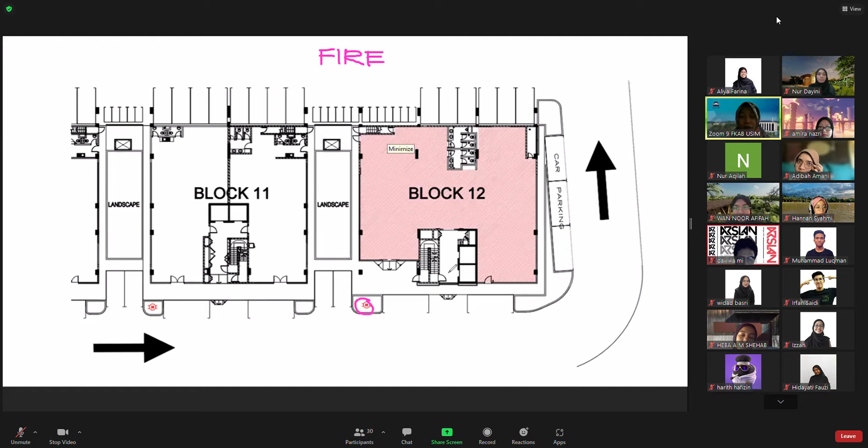Okay, remember, just the fire requirement, you have to understand the route, or the fire appliances. Where the fire appliances, meaning fire engine car, fire engine lorry, access to your building. So I can foresee that normally when we do the drawings to submit to bomba, we are about to color the pathway, the road to our site.

So maybe the color of the road is yellow, normally for submission. This is actually the accessibility to the lots. Normally we color it in yellow. So this is just to say that the whole thing here is fire access.

Remember that I'm telling you the chart of how much is the fire access requested. There would be one quarter, okay, based on volume, meaning that you have to calculate.

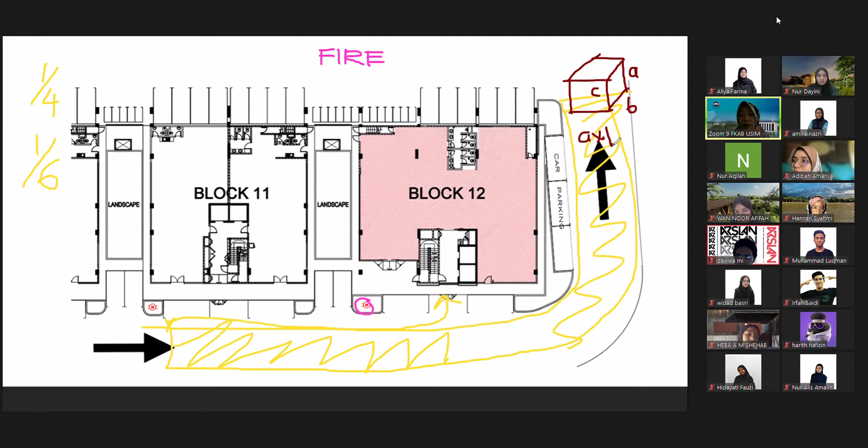You have to calculate the volume. What is the volume? Volume of the building. A times B times C, A times B times C is volume.

Betul tak, volume? This one you have to present in your site analysis lah. When is your presentation for site analysis?

Hello. When is your presentation for site analysis? Yes, it is so near because the legal group need to calculate. Refer to my chart, to my notes.

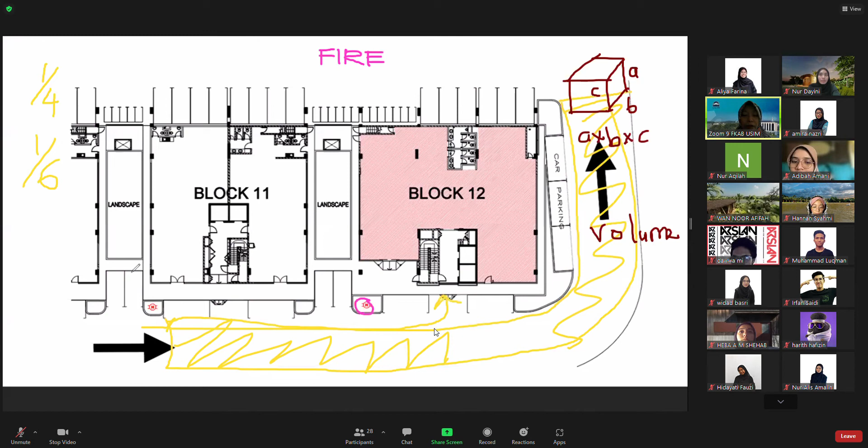So the volume, from the volume you will determine whether, okay, let's say this is your site and this is your building, so you have to determine your accessibility. Is it up to here, or is it island? Island means surrounding.

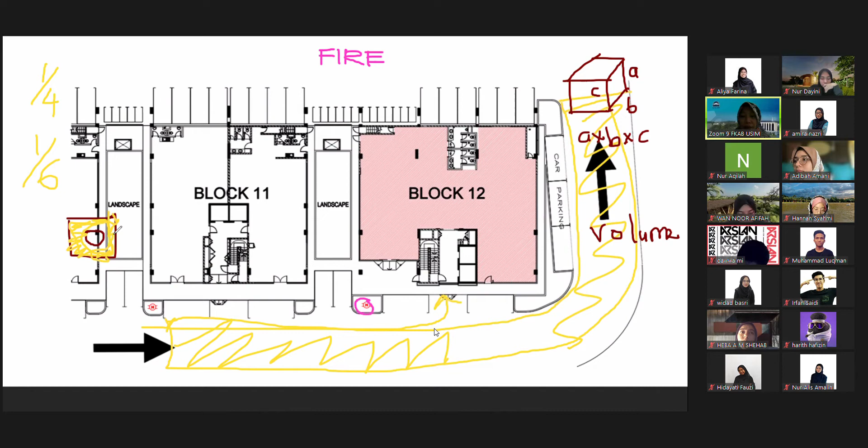Island means all the area except the center, because your building is at the center. So it's considered as the accessibility for fire appliances. Remember that. Okay, for this one, after you already check the accessibility, you know the accessibility, the road, how much?

1/4, half, 3/4. So you have to understand where is the location of hydrant. You have to understand that. After you understand that, you need to know, is this building using wet riser or dry riser?

Wet or dry? How to differentiate? You have to differentiate based on the height of the building. You have to know if the building is more than 30.8 meters.

This is, you have to refer which section in bylaw. Please check the previous. I will let you know because you have to check, you have to read. If not, you are not reading your bylaw.

Okay, is it 30.8 or 18.5 meter that need dry riser? Okay, below 18, you need to use wet riser, meaning that it's a hose reel indicated inside the building.

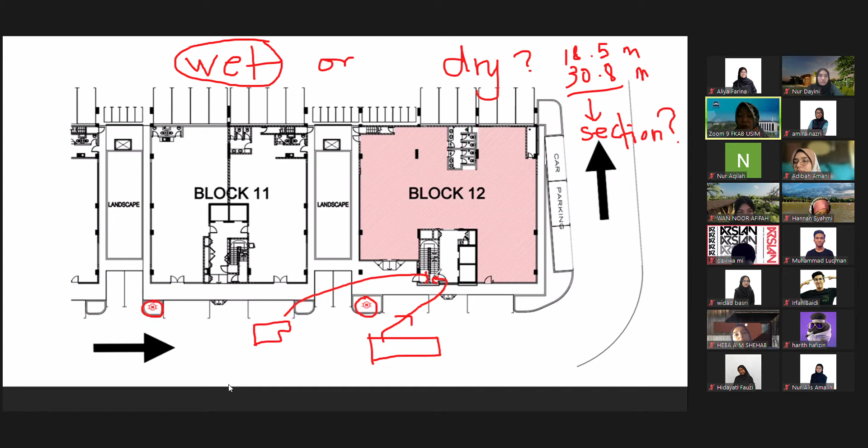Dry riser normally for the building that exceed the height of 18.5 or 30.8. This is according to bylaw.

Find out. Haris, are you hear me? Haris. Ada. Yeah. So far, so far, why do we want to use wet riser or dry riser? What is wet riser, dry riser?

Is the supply of water. If we are on fire, supply of water. If the building on fire, you know?

Okay, that is why the responsibility of architect is very big, because we have to know how the occupant inside the building evacuate, save themselves, evacuate from fire, get out from building immediately.

So it's important for architects, right. If you are not doing your work, your task, you are designing differently, not according to bylaw. I think this is your responsibility until the hereafter. Until the hereafter, they will ask you, hey, Architect Haris, why have you not designed the hose reel accordingly, or fire staircase? This is your responsibility.

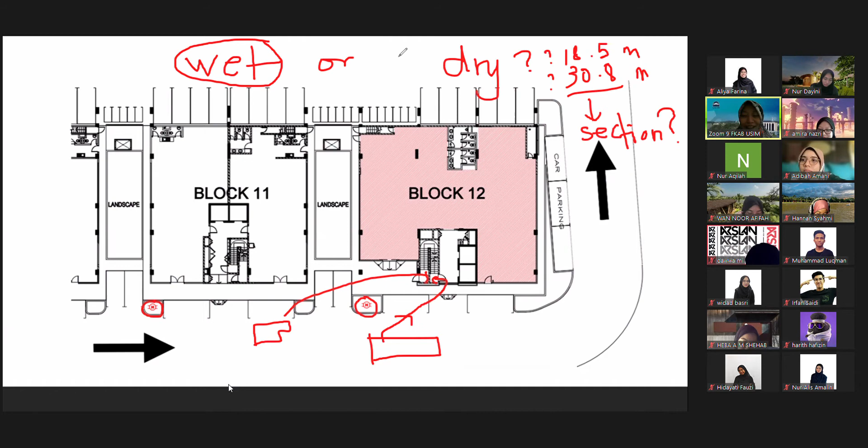You're expert, Haris. Okay. Okay, then today we are learning about the core area, the lift lobby, the lift.

Yes, yes. I have a question. Now I get confused for wet riser and dry riser. So it depends if the building uses either one of them. Because what I know, dry riser is like the valves and pipes that supply the upper floors with water.

But ground, normally ground, they will put the dry riser at ground because they want to attach when the fire comes here, when the fire engine is at your place, the fire engine will supply. There is inside the fire engine there will be a supply of water. They will put the hose here, and from the dry riser, there is a pipe here.

Pipe riser mean vertically, pipe. So let's say this is the area for the hose, hose. So this hose actually with the piping, they will distribute the water to other floor.

Okay, you don't understand it? Okay, I try to find this. Okay, when the fire engine come, they will supply the water through the hose, empty hose. Then no water inside empty hose. So the empty hose, we call it dry riser.

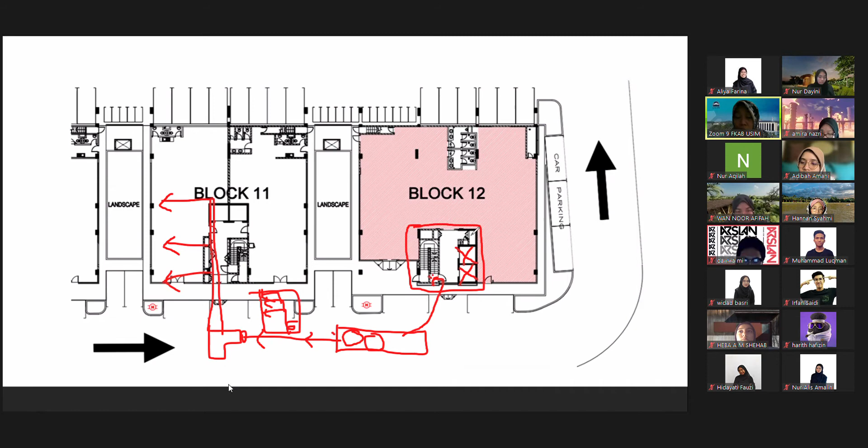So there will be a piping here. Where you want to allocate piping? Of course, when you are designing the core, there would be a place for fire hose, for hydrant, not fire hydrant, no, hose reel, for hose reel. Okay, I understand. All right.

But okay, the wet riser has like permanently tied with water. Correct, there would be a piping. Okay, I try to find the...

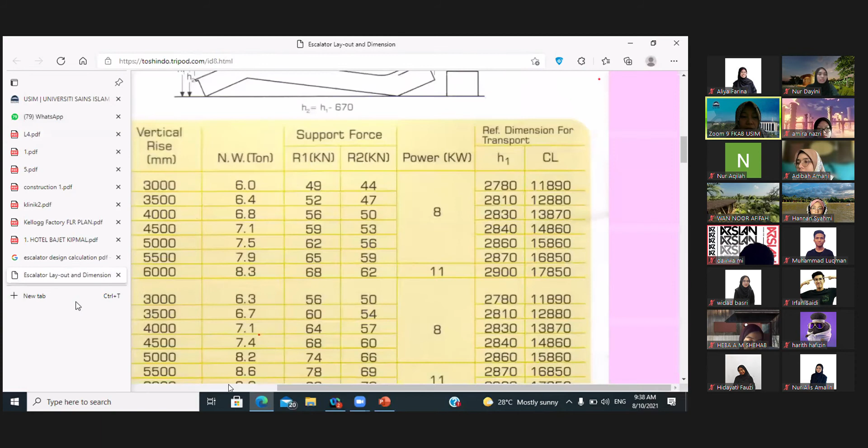I try to find the picture here so that you can easier understand. There would be a lot because I'm also referring the drawings, the exact drawing that I'm sending to Bomba, so that you can get a fresh idea, fresh picture of what I'm talking about. Okay, wait, I'm sorry. Okay.

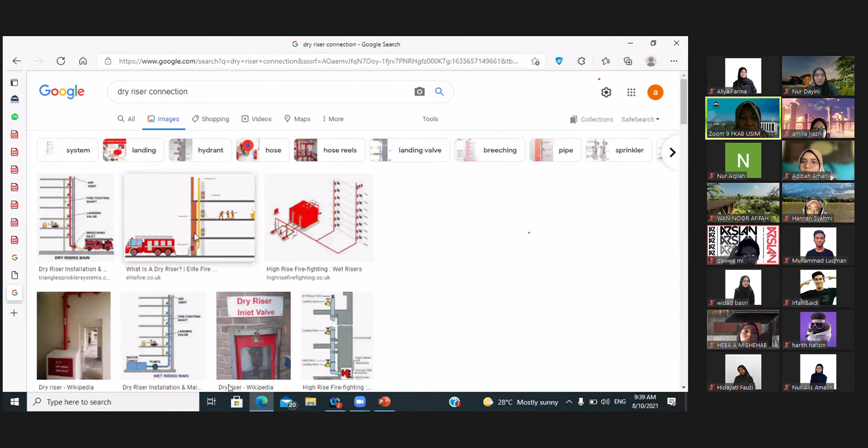Did you see? You forgot already. Okay, there will be this one we call a riser, vertical riser. It's a piping vertical riser. This area is empty. There's no water until the fire engine comes.

So the fire engine will see there's an inlet, the breaching inlet. They pump the water and distribute it to all the floors. So for this one we call it a dry riser, because when the fire engine is not here, meaning there is no water supply. It only provides the hose, the inlet.

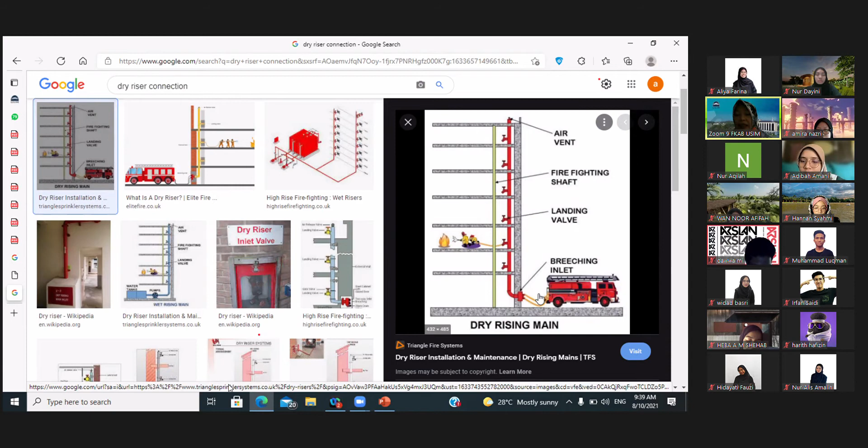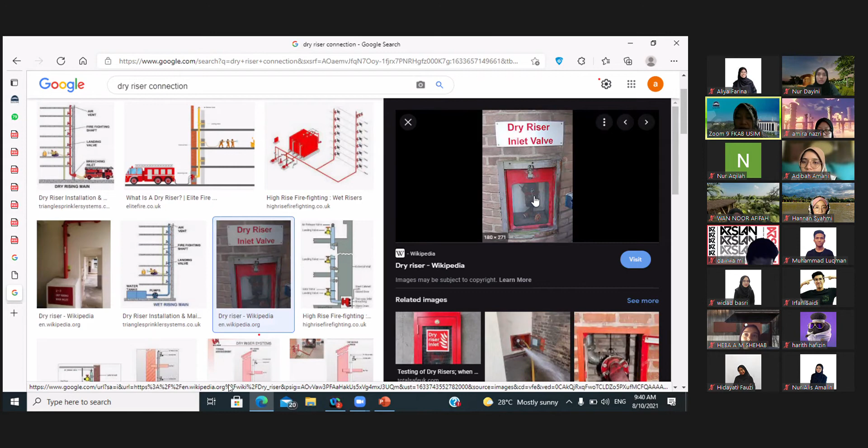Okay, where? You may see here, the dry riser inlet valve. It's only the hose there, the inlet. No water. Dry riser. When the fire engine comes, they will just connect this one, and the water goes up and distributes.

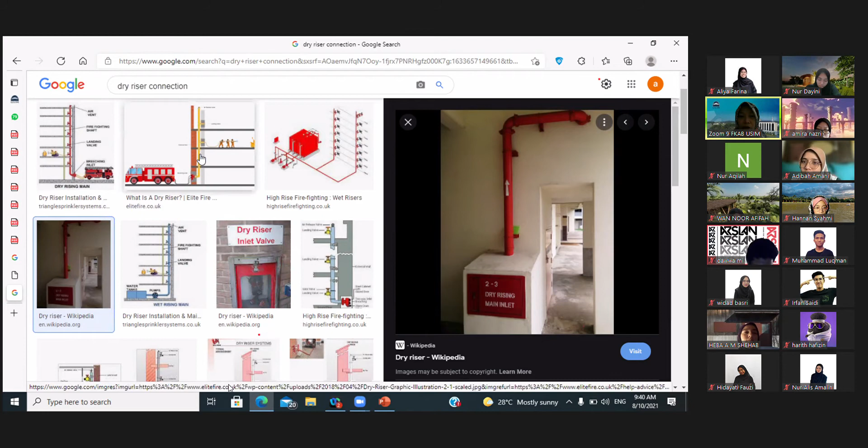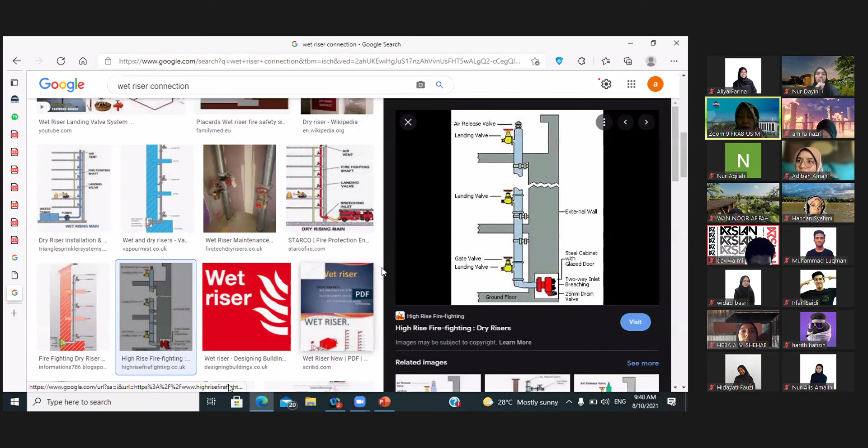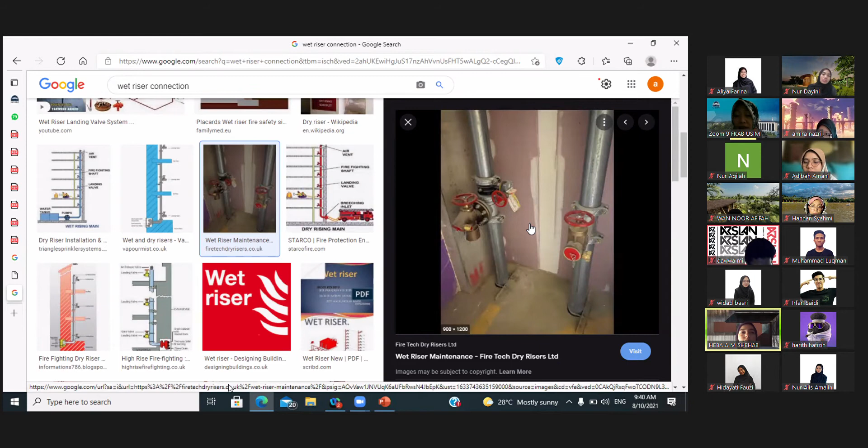See? Okay, this is what a wet riser is. Wet riser meaning that they already installed it, the water is already there. It's a wet riser, maintained. Where do they get the water? Because they already have the tank, the fire tank. We don't call it a water tank, because water tank is for water supply, domestic use, for flushing toilets. But this one's main purpose is only for fire, when there is a fire.

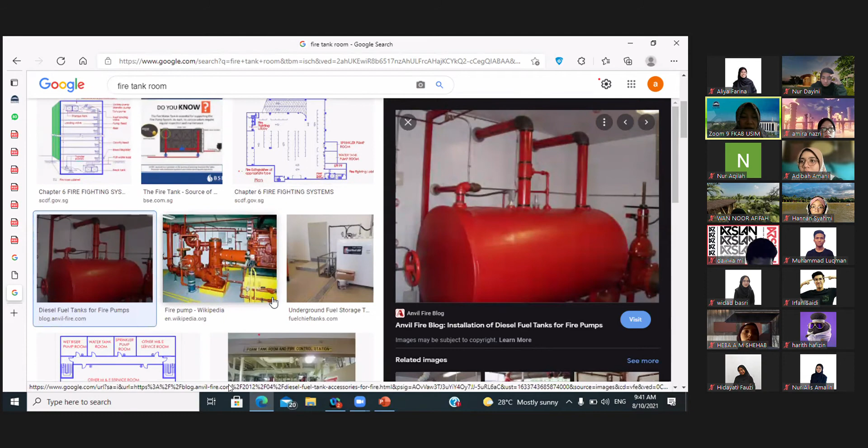Okay, so this is the piping that has water from the fire tank. I'm telling you, fire tank room, so your room... okay, no, that one is for the fire pump. This is the fuel tank. Firefighting pump room, see. Everybody must draw a fire tank.

This is for a big building. How much? We will calculate how much according to the volume, according to occupants, how many people, and also the volume of the building later on. Okay, so this is the fire sprinkler, water tank for fire plus fire sprinkler.

Sprinkler, where is the sprinkler? Like sprinkler fire, this is sprinkler. Harith, don't forget. Ikhwan, this is sprinkler. Yeah, this is it. Okay, normally we can see that at the basement area, because the basement area is bare, there is no ceiling. But on the upper floor, we only see this because it's already fixed below the ceiling.

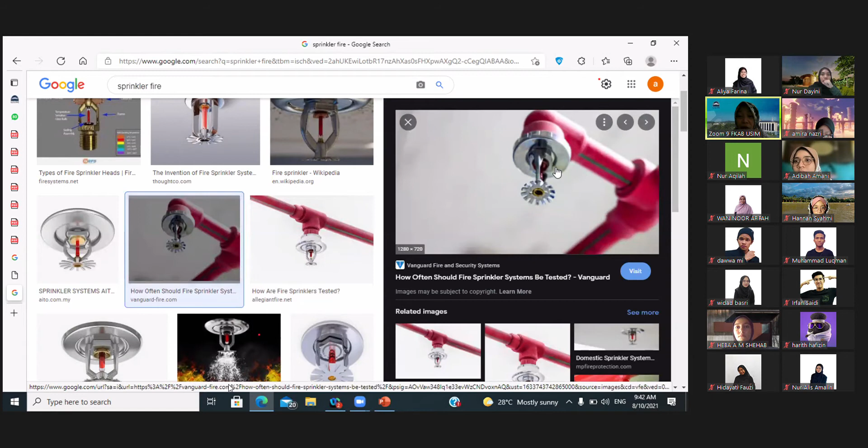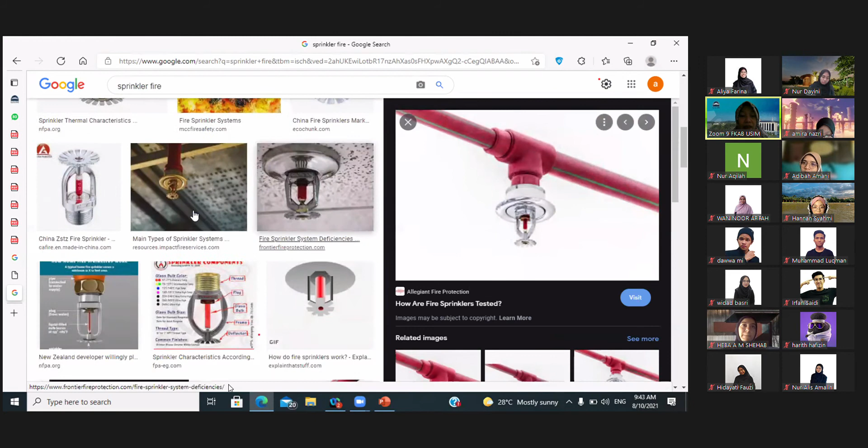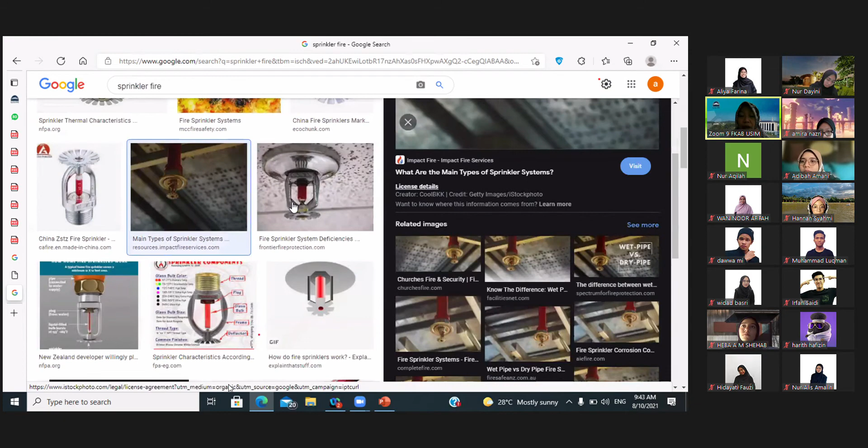Okay, if we take out the ceiling at the upper floor, the image is just like this. You see the pipe, the red pipe, it has to be the red pipe. Harith, red pipe now. This is actually, if you can see it bare, meaning there is no ceiling, meaning this area at the services area or basement area is not habitable by humans.

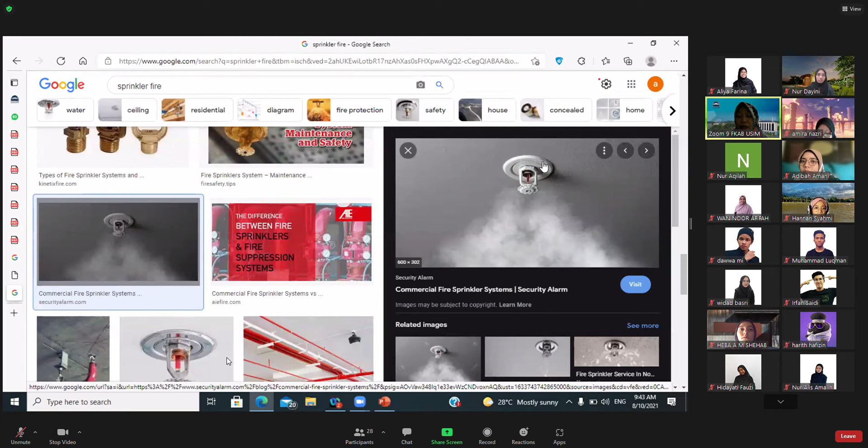It's not an office. Okay, like this, they already covered it with a ceiling. That's why you cannot see it. At the office area, at the shopping complex area, you may only see this because it's covered with a ceiling. Okay, come back to my notes, my lecture notes.

What are you doing now? Okay, the hatching color means it's a nettable area. Net, a place where humans occupy the room, the area, and it can be rentable. Boleh disewa, boleh diduduki, tempat bekerja.

Okay, when we talk about gross area, what is gross area? This is design. Gross area meaning the whole thing. What is gross area? What is net? Okay, normally when you want to sell the blocks, people will ask you, what is your gross area?

Gross area means, when you work later on with industry, all dimensions, all inclusive of the services area. This is gross. Semua sekali. Dimension from here times here. Okay, gross. In the exam they will ask this, gross. You have to know what to calculate.

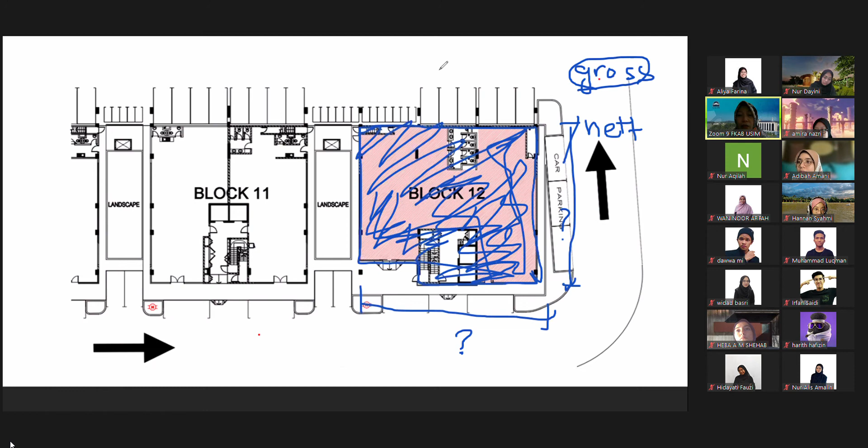Okay, when we call it net area, meaning net, what is net? Where is the net area? This is net area, excluding the services. Net area is not inclusive of the services. Parking is services. Sorry, my hand is not proper. Oh, my bad. Okay, sorry lah, macam ni lah.

Okay, the hatching, so this is net area. Normally, after you graduate and work with a developer, this is very important in their calculation, because the tenant, those who want to buy the blocks, the area, they will calculate the net area because they want to calculate the maintenance fee. So this is net.

So, Madam, the gross includes the perimeter for fire access. Okay, this is the services area, this is also the services area. We call it the services area. Services area is a shared facility.

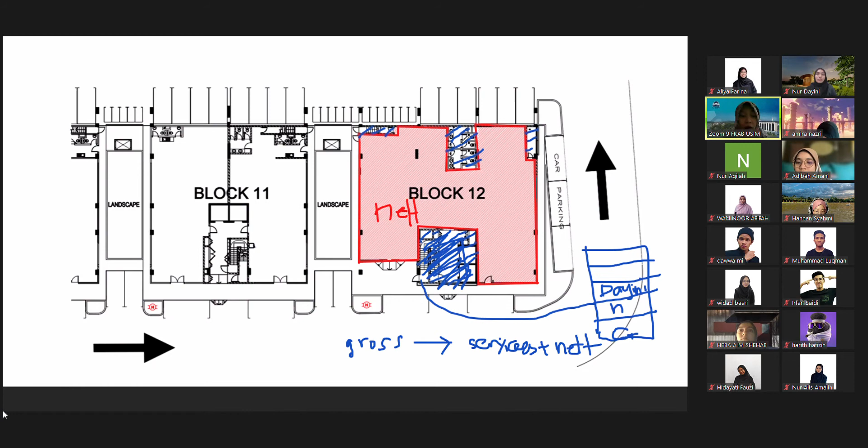Services area plus net, that's the total floor area. When Bro Fadli asks what is your total floor area, gross floor area means all plus - if you have sub basement or basement, calculate all.

Okay, also for today, my concern is the fire staircase and also how you want to design the lobby with lift. What is the lift lobby? This is lobby - I cross here because this is void. And also what should be included in your lobby area as services.

Okay, you can see that normally they have a core - we call it a core. Why? It's because the thickness of the wall is different from here. The thickness here and here is different because for the core we allocate about 230 mm. This one, the thickness compared to here - the wall here I think is only 150 mm.

For the fire protection. Once the building is on fire somewhere here, people at the ground floor of course go directly outside.

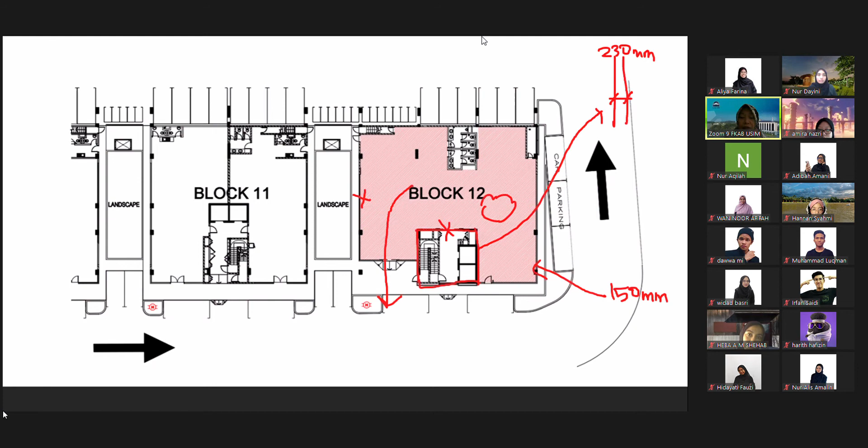Yesterday, last 2 days on Wednesday, we learned about the opening. See the opening here? What happened to the opening, Ikwan, can you tell me?

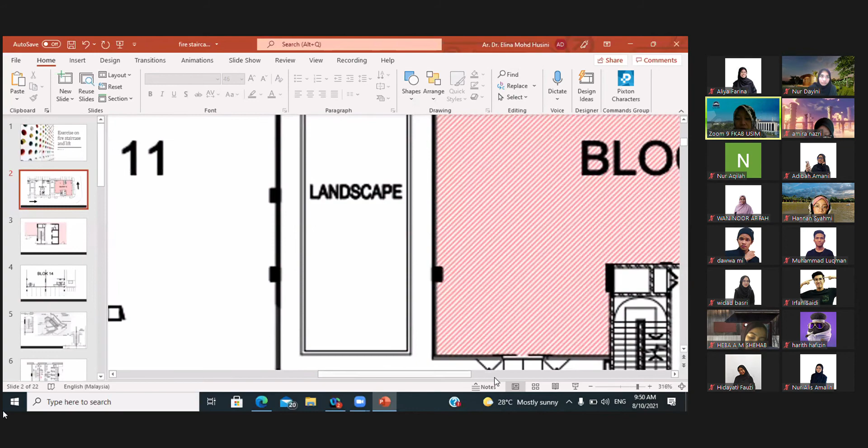Okay, I will highlight here. What happened to the opening, Ikwan? This is at the ground floor opening - which one, madam? The fire door.

Fire door - the opening must go outwards. Yes, outward is this one. Is it correct? Where's the outward on the ground floor? This is ground floor. Outward, out - it's not like this, this is wrong. Okay?

Zul, do you get it? Understand, Zul? Can, madam. Alright, this is easy. But this is always where people make mistakes. Okay, remember, if fire staircase - even if you are really good in graphics, very good in everything, but you make a mistake at the fire staircase, you can still fail.

Why? If your building is good, the graphic is good, but the building is not safe for occupants to evacuate during fire, you fail. The drawing of the building is not functioning well. Okay, remember that, you see?

Maybe Hannan says, 'it's just a tiny bit of fire staircase, madam.' No, cannot. Okay, when you are on fire, you are very panic. You cannot run faster. Okay, see this one.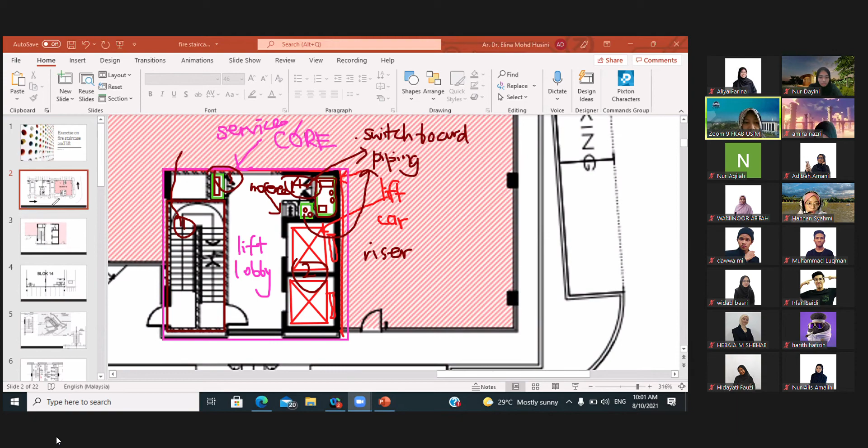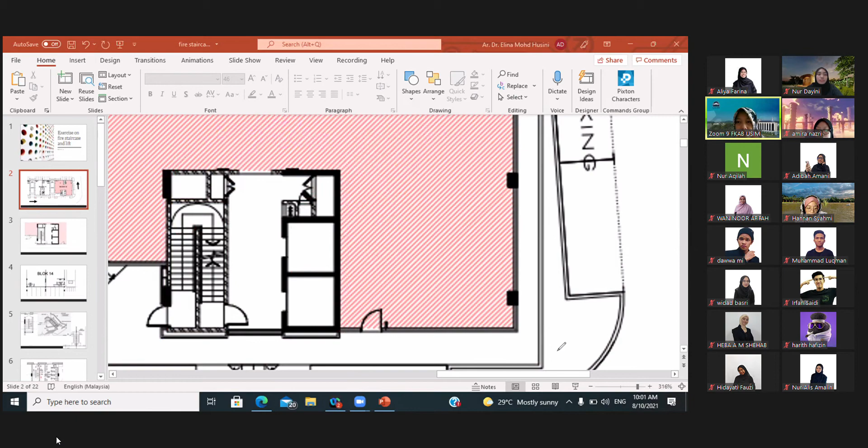Okay, so I continue a bit from before. I think everybody is clear what is the component needed inside your lift lobby, your lift core. Okay, so this is actually not the exact detailed drawings, but your drawings for submission need to be very detailed, meaning that you need to draw the lift car.

Alright, and also see how they actually draw the fire staircase. See? They must have the arrow here. I understand that some students are not doing this. This is very important, show the arrow, the direction. Are you directing people to go upstairs or downstairs?

Okay, this one, what happened here? Why is this quite confusing? It's because the arrow here is actually from the basement. This is not your level yet, but you need to understand why the arrow is slightly different. This is for upper floor, from the ground floor to basement, because down here there's a basement.

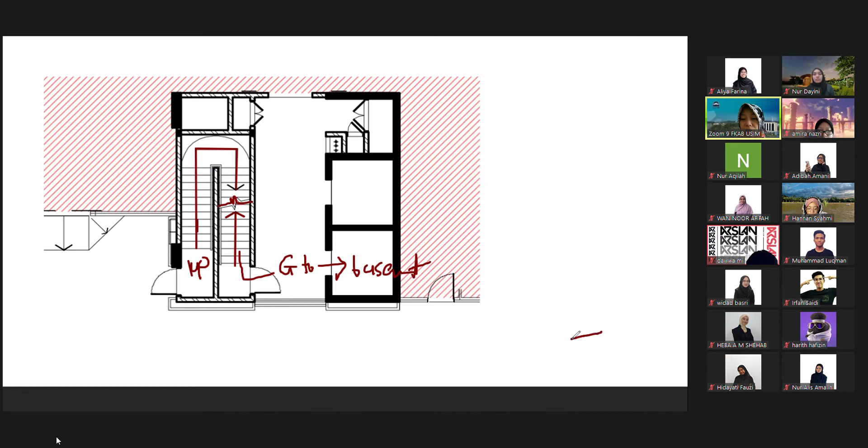This is just for your additional understanding. I know your second year there is no exercise to do basement, but you need to know why the arrow is like this. They cut here, meaning this is going up and this is going down.

Okay, I draw nicely. If you are here, Shafiq, when Shafiq is here, meaning Shafiq wants to go down there. This is ground level, meaning Shafiq wants to go down. If Shafiq wants to go upstairs, Shafiq is going to use this floor, this arrow. This arrow means from ground floor, you are coming up here.

Why do you need to draw arrows? So it doesn't confuse people. People know where the direction is, when there is an emergency they know where to go. Okay, Amira, Hanan, very clear.

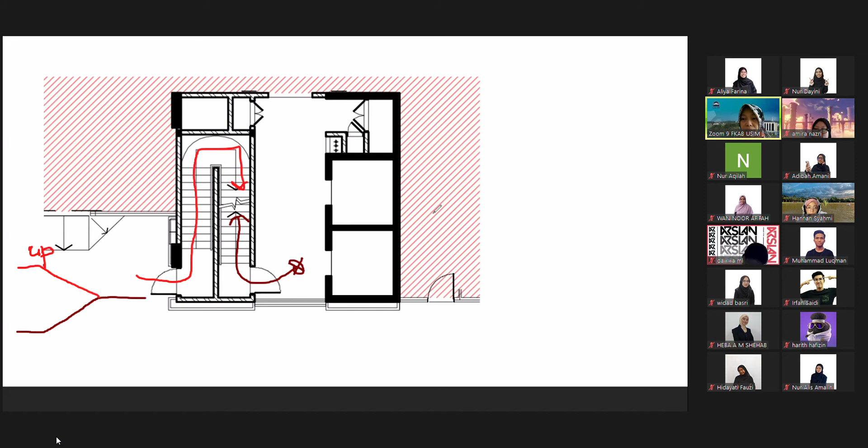Very clear. It looks simple, but when you really come to drawing it in reality, you have problems drawing it.

I've already shown an example. This is based on a real project, this drawing project. When we become the submitting person, become the assistant, you need to draw like this. This is straight flight, meaning straight flight.

So normally for the internal, it's okay, the height and also the steps are accordingly, 14 steps. But when you draw the staircase for public outside the building, you tend to have the landing after step number 14. Okay, correct Syafiq? Ikhwan, how's that, Ikhwan? Explain a bit, Ikhwan, what I told you last week, last Wednesday.

Which one, madam? The staircase for public, straight flight and also the landing. Why, when do you need a landing? When we want to design... this is internal, what happens is when it's more than... okay, when is it needed? When is it needed? More than 15, yes.

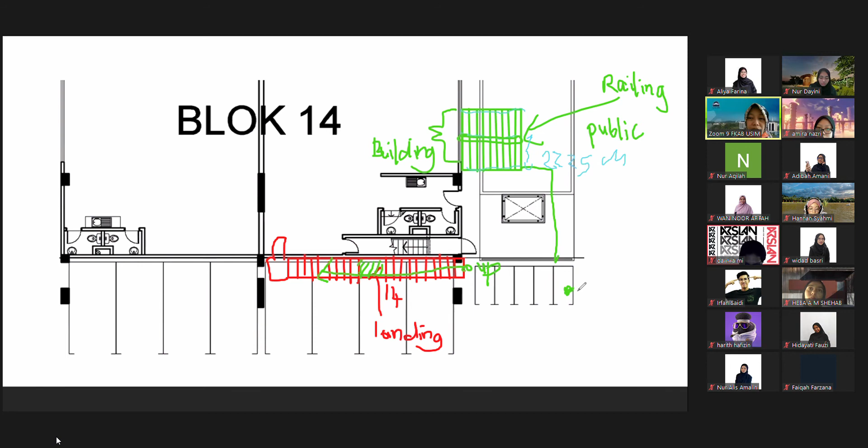Okay, and also, you draw here, okay? See, this is a fire staircase. You think that this is what level to what level? The fire staircase is actually at what level?

I will try. So, okay. So I think this is... you draw at the upper level. Starting from first floor level to topmost floor level. Yes, ah. So for this, it's at the ground level.

Look at this arrow, because you look at the arrow. Okay, this is not the topmost level. This is, okay, let's say the building, let's say the building has how many stories? 3 story, 1, 2, 3. This staircase represents the staircase for first floor level, because there's still an arrow to go upstairs. That's why the arrow is important, you draw a fire staircase, you must draw the arrow.

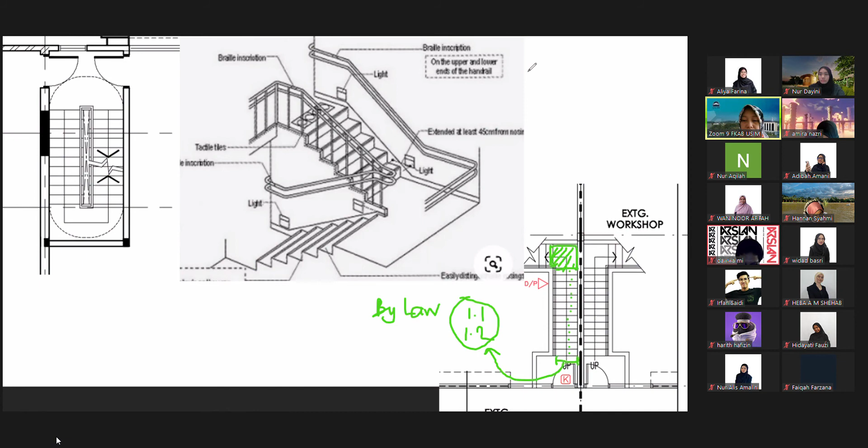All right, next. Some of the area at the core area, the core at the back, they will position the fire staircase at the service area that is situated with the washroom, the toilet area. What to be indicated in this area for services? The fire door, fire staircase, the washroom male and female, and some of them provide OKU. Let's say that OKU here - I don't include it here because I'm just taking this certain portion. This is for the OKU toilet.

See, this one must have a minimum dimension. They must have a minimum dimension. Here, this is the chance for you to provide the dry powder. The FD is fire door. I'm sharing this one with you.

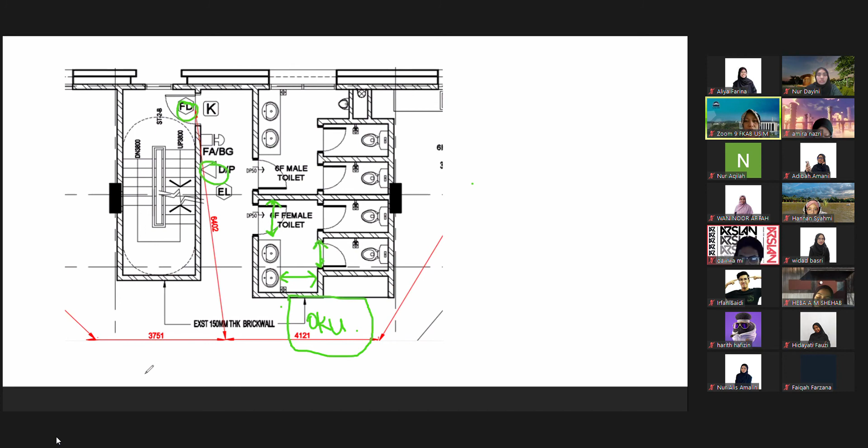All right, how about this one? Go back to our lift lobby. So normally for lift lobby, there are also calculations for how many lifts that you need to provide for each building, based on the occupancy. We have to refer back to Schedule 6. We have to refer back to the previous section that I wrote to you. Which section? Which section? Now come to lift.

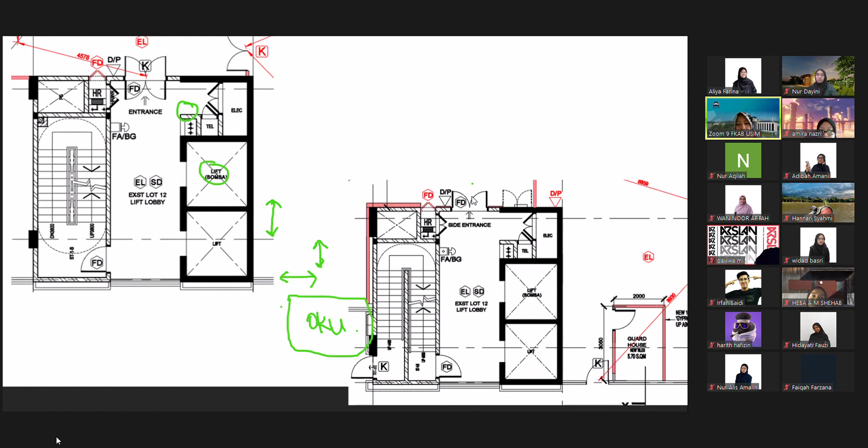Aliya Farina, last Friday I asked you to read which section on the lift. Which section? I asked you to read which section first. Look at the WhatsApp group. You have to read, Alia. If you don't read, you cannot attend this class because you don't understand why I'm saying this is not to be here, not to be like this, this cannot, why? So you have to read that. Yesterday I asked you to read first and you have to compare here.

These two lifts must provide one for the bomba (fireman) lift. This one is for passenger, a normal passenger. Meaning that this is for public to use, and this is specifically when the building is on fire - only the bomba can use this lift. Okay, Alia? Yes, hello, okay, yes.

Okay, see this one, you have the electrical, the telecommunication, telephone wiring here. This is HR, hose reel. K is the sign for keluar - keluar in Malay means to go outside. Sign K, there would be a light on top of the door saying keluar. So now you know bahasa, keluar.

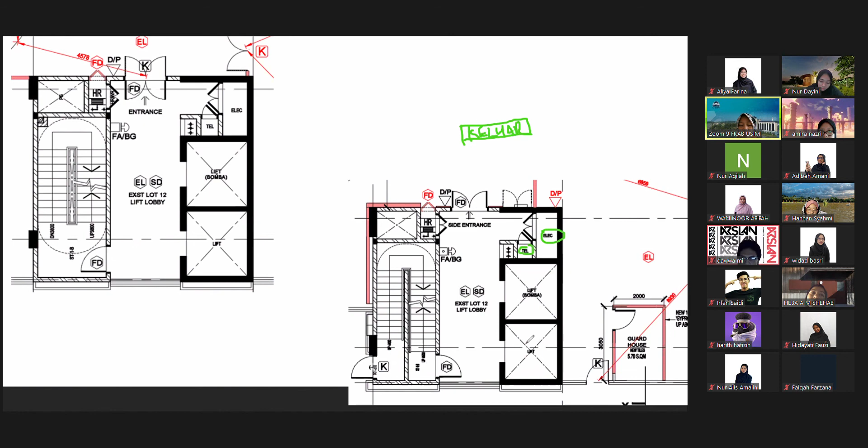So this is the lift lobby. So you understand this is the lift bomba. So this, they don't draw the lift car. For your submission, you must draw a lift car. Cannot be like this, you must draw it. This is the core inside.

Okay, this is a lift. You must draw the lift car for your submission. This one is different, okay.

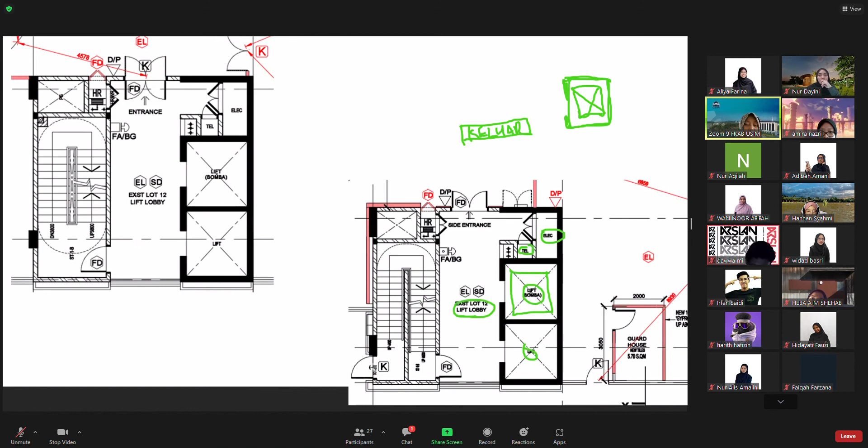Some of the designs, they also can do it like this. What's so important here is the dimension. You need to understand there is a dimension, not simply draw the lift. So the opening here, you have to take care of. What is the minimum? If you draw A here, meaning that it has to be 2 times A here.

This is a lobby, so you cannot provide the dimension half of it, just A. It has to be 2 times the opening. The opening here is A. This one is 2A. Minimum is 2A for the lobby. The minimum is 2A, I mean it can be bigger.

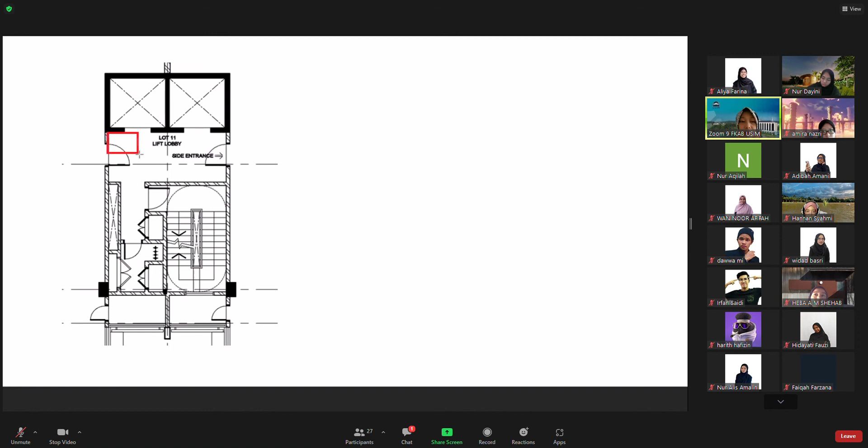Okay sorry Heba, what did you say? Yeah, I meant for the lobby - is it minimum 2A? Can it be bigger than 2A? Oh this one, okay, this is actually the lobby. Eddie, you cannot go down. Okay, this is a lobby, this is a lift lobby.

This is a lobby. How much dimension do we need to provide from here to here? The minimum. The minimum is 2A, right? Yes, double. 2A is the minimum.

Based on this, what is the opening of the lift? The size of the opening of the lift will determine the width of the lift lobby. Let's say the opening of the lift is A, so in front of it is the lift lobby. The width is about 2A. If this is 1.5 meter, it has to be 3 meters.

Okay, very easy. I'm just asking if it's the minimum. Alright, 2A is the minimum. You cannot be 1A, okay?

Balkis, you get it or not? Fahmi? Fahmi, don't sleep. Because this is third year, you don't really get this one. This is my final say.

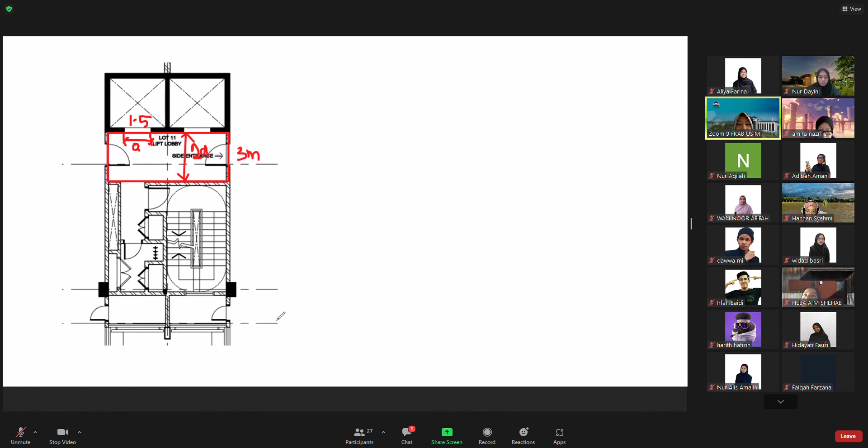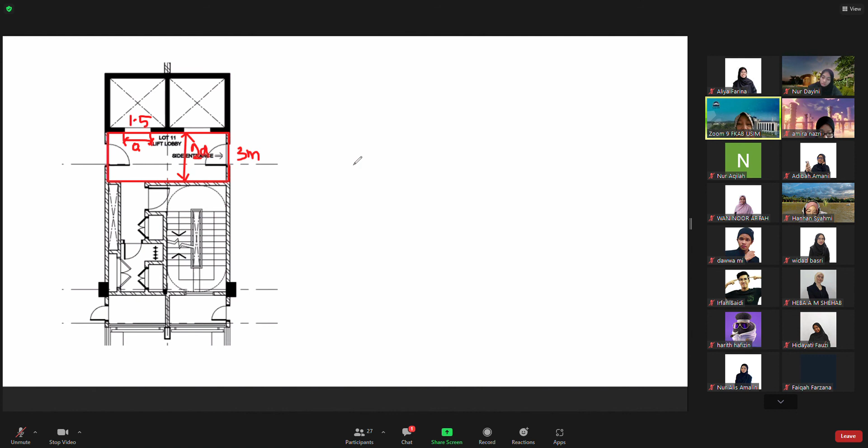Fahmi, where are you? Okay, if you have a problem, you have to tell us, because I am not repeating this information. I do not know. I'm not repeating, so you have to tell us, so we will facilitate you with the information.

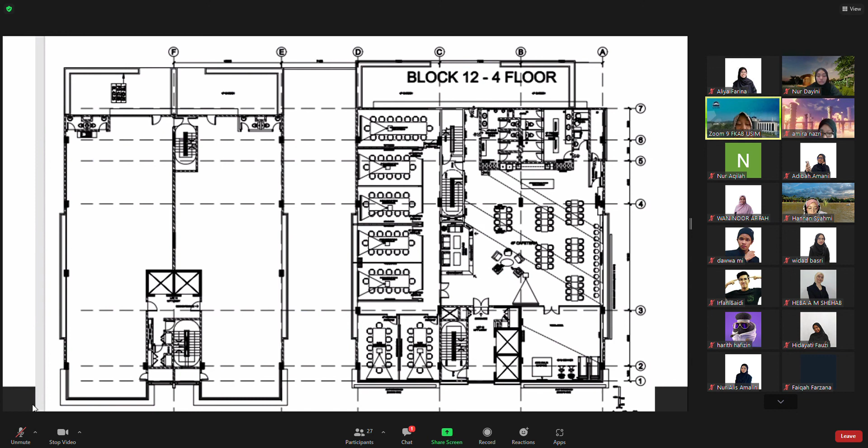Same goes to this one. There are also people who draw the fire staircase, but this is not recommended. Why is it not recommended to draw the fire staircase like this? People will be confused - which way to go up, which way to go down? Are you using here or are you using here? So it's not recommended. Normally they will separate the fire staircase.

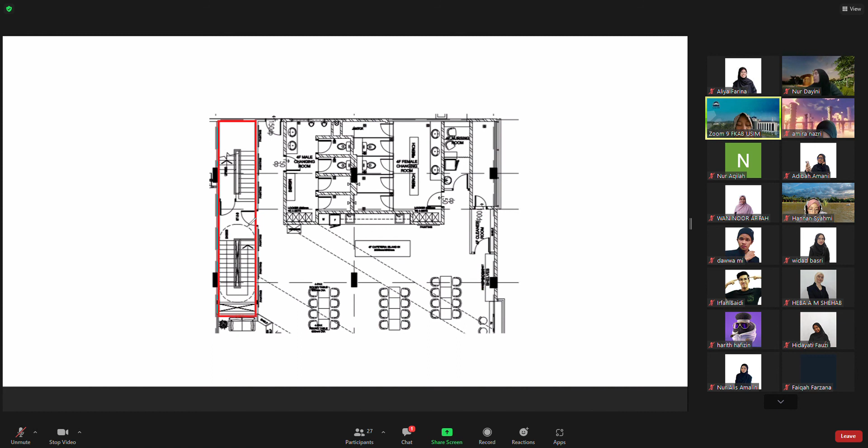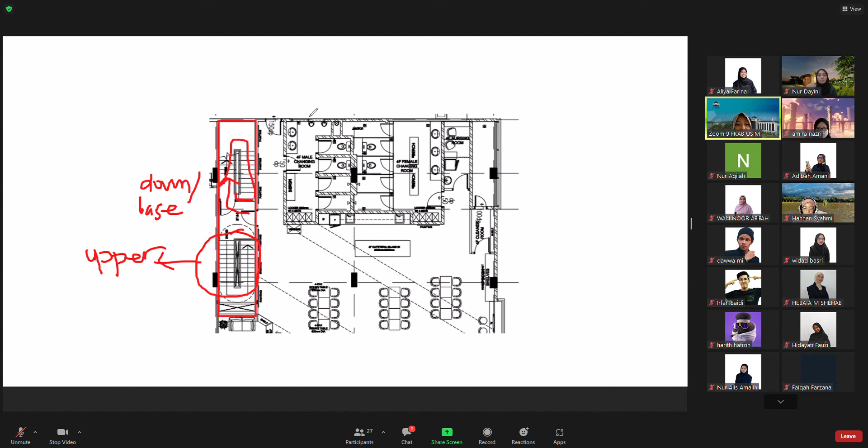Unless it happens at the ground floor area to basement. If ground floor area to basement, then they have to provide this staircase to go to the upper floor, and this staircase is to go down to the basement. Or if we are providing this, meaning that this is maybe going to be the topmost floor, because this is a railing, no more staircase onwards. No more staircase onwards.

Okay, this is never mind. This is how much door to be provided in a room.

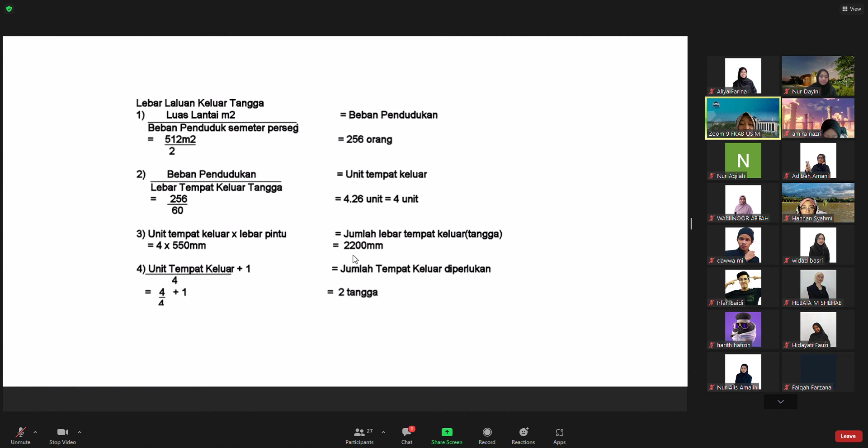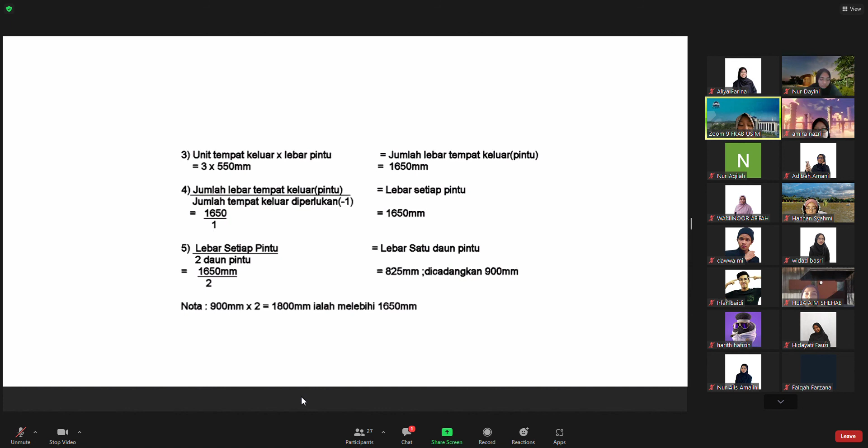I have to translate because I take it from the bomba submission - the bomba submission is in Bahasa, so I have to translate for you. This is actually the calculation, how much door you want to provide for the building. How many doors to provide for the building? Okay, this is normally for a complex like hostel, shopping complex, shop lots, or multi-purpose hall. How many doors need to be provided? There is a calculation, okay, later on.

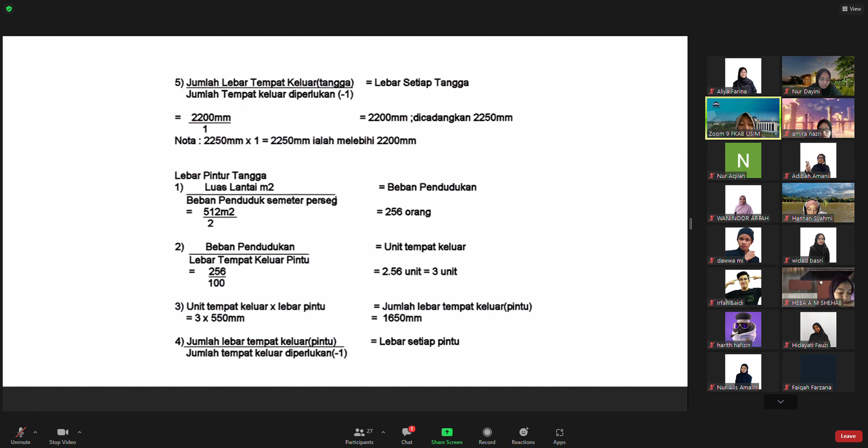I jump first to calculate the staircase. Okay.